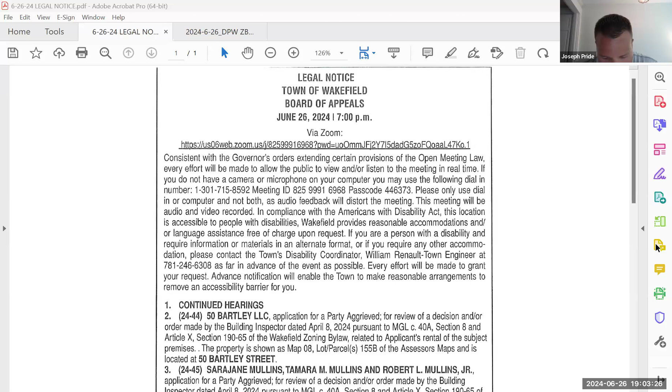As audio feedback will distort the meeting, this meeting will be audio and video recorded. In compliance with the Americans with Disabilities Act, this location is accessible to people with disabilities. Wakefield provides reasonable accommodations and or language assistance free of charge upon request. If you are a person with a disability and require information on or materials in an alternate format, or if you require any other accommodation, please contact the town's disability coordinator, William Renault, town engineer, at 781-246-6308. As far in advance as possible, every effort will be made to grant your request. Advance notification will enable the town to make reasonable arrangements to remove an accessibility barrier for you.

1. Continued hearings. 2. 24-44 50 Bartley LLC. Application for a party aggrieved for review of a decision and or order made by the building inspector dated April 8th, 2024, pursuant to MGLC 40A, Section A, and Article 10, Section 190-65 of the Wakefield zoning bylaw, related to the applicant's rental of the subject premises. The property is shown as map 08, lot parcel 155B of the assessors map and is located at 50 Bartley Street.

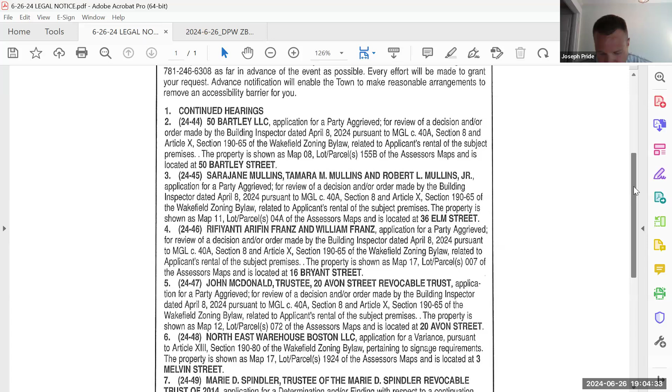3. 24-45 Sarajane Mullins, Tamara M. Mullins, and Robert L. Mullins Jr. Application for a party aggrieved for review of a decision and or order made by the building inspector dated April 8th, 2024, pursuant to MGLC 40A, Section A, and Article 10, Section 190-65 of the Wakefield zoning bylaw, related to the applicant's rental of the subject premises. The property is shown as map 11, lot parcel 04A of the assessors map and is located at 36 Elm Street.

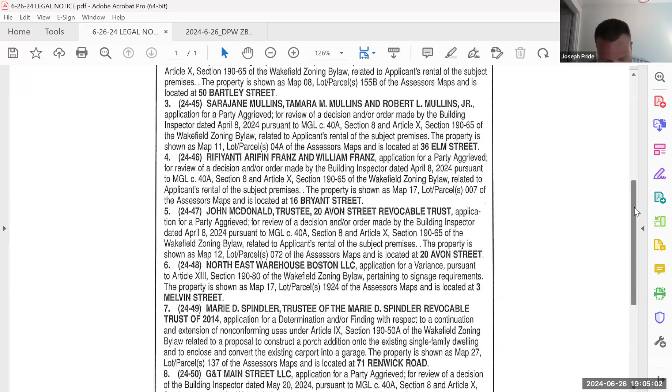4. 24-46 Rifiyanti Arifin Franz and William Franz. Application for a party aggrieved for review of a decision and or order made by the building inspector dated April 8th, 2024, pursuant to MGLC 40A, Section 8, and Article 10, Section 190-65 of the Wakefield zoning bylaw, related to applicant's rental of the subject premises. The property is shown as map 17, lot parcel 007 of the assessors map and is located at 16 Bryant Street.

5. 24-47 John McDonald, trustee, 20 Avon Street, revocable trust. Application for a party aggrieved for review of a decision and or order made by the building inspector dated April 8th, 2024, pursuant to MGLC 40A, Section 8 and Article 10, Section 190-65 of the Wakefield zoning bylaw, related to applicant's rental of the subject premises. The property is shown as map 12, lot parcel 072 of the assessors map, and is located at 20 Avon Street.

24-48, sorry. Northeast Warehouse, Boston, LLC. Application for a variance pursuant to Article 13, Section 190-80 of the Wakefield zoning bylaw pertaining to signage requirements. The property is shown as map 17, lot parcel 1924 of the assessors map, and is located at 3 Melvin Street. 7.

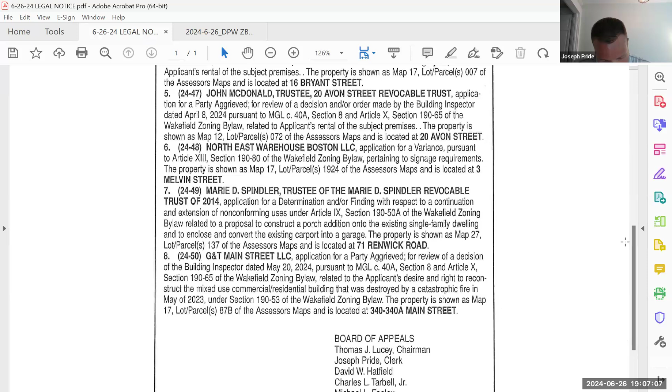Marie D. Spindler, trustee of the Marie D. Spindler Revocable Trust of 2014. Application for determination and/or finding with respects to a continuation and extension of non-conforming uses under Article 9, Section 190-50A of the Wakefield zoning bylaw, related to proposal to construct a porch addition onto the existing single-family dwelling and to enclose and convert the existing carport into a garage. The property is shown as map 27, lot parcel 137 of the assessors map, and is located at 71 Renwick Road.

8. 24-50 G&T Main Street LLC. Application for a party aggrieved for review of a decision of the building inspector dated May 20th, 2024.

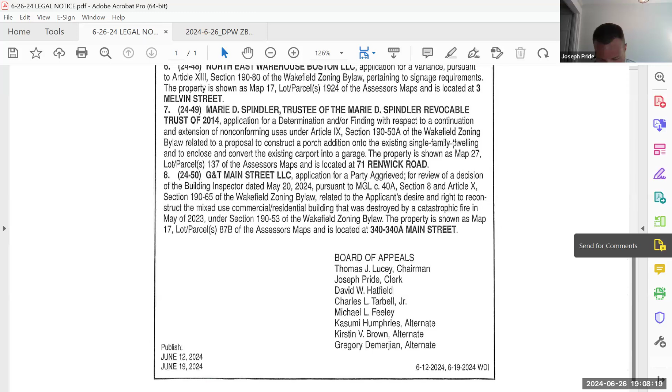Pursuant to MGLC 40A, Section 8 and Article 10, Section 190-65 of the Wakefield zoning bylaw, related to the applicant's desire and right to reconstruct a mixed-use commercial residential building that was destroyed by a catastrophic fire in May of 2023, under Section 190-53 of the Wakefield zoning bylaw. The property is shown as map 17, lot parcel 87B of the assessor's map, and is located at 340-340A Main Street, Board of Appeals.

Thank you, Joe. Tough one tonight.

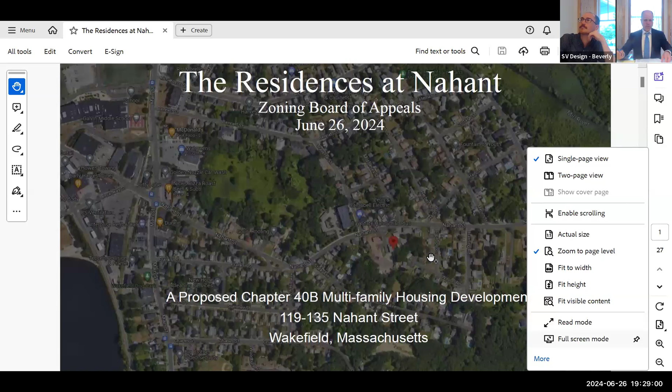Absolutely. So what we thought might be helpful is to talk about— yeah, this isn't sending.

So what we thought would be helpful is to talk about some of the design changes, in addition to the requested waivers and many other elements of this proposed development that you are very keen on understanding and focused on, the architectural plans and how we think this is going to look. You want to make sure that as we present it, it looks as it would look superimposed on the existing condition. Is that a fair characterization? We added elements like telephone poles, things that are on the site now that we don't expect to change all that much.

Through the chair and the board, I'd like to hand it over to Stefano, who can walk you through this. Again, we will confine this presentation to just changes. We won't go over what we've already talked about in the past, okay? Try to move quick here. Stefano Basso, SV Design, office at 126 Dodge Street in Beverly. Thanks for having us again tonight.

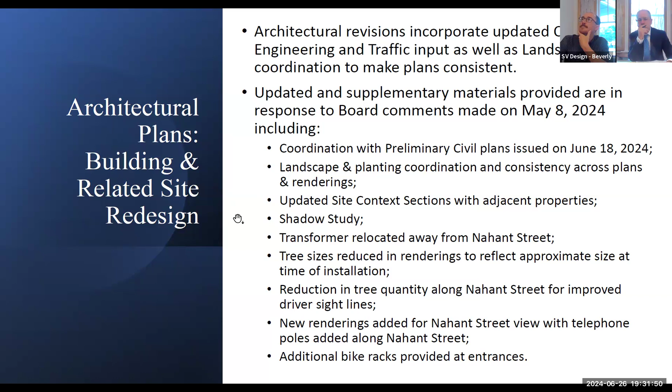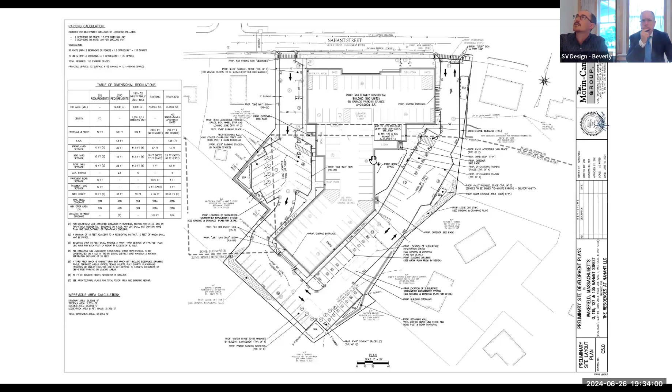The EV charging station is a little tough to see. Can I zoom in? EV charging spaces are located here, so those are closer to the building, closer to the garage entrances.

The fire departments typically like to see them outside of the building because of the risk of fire. They like to see them close to where they can get to them on the site. And we try not to locate them too far away from the building because of the conduit runs. So those are the spots for the EV charging.

This is a little easier to read, the transformer over here on the east side. If you remember, it was back here right in the corner off the sidewalk before. So originally very visible from the roadway, now it's tucked back.

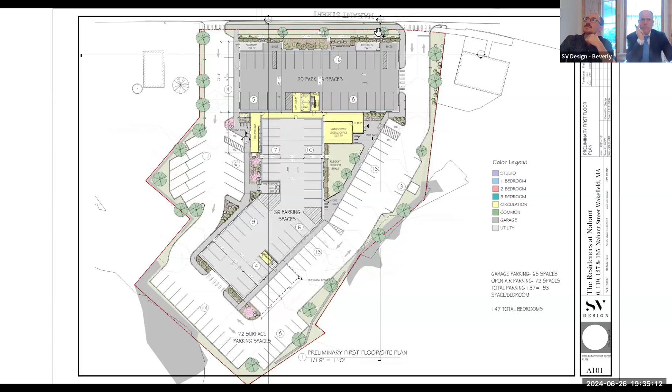We have cut back the fence on this corner here as well to allow for better sight lines. And we've reduced the trees we're showing in front of the building so that a driver exiting the property has a better sight line and less obstructions looking to the west down Nahant Street.

No changes to the building floor plans, so I won't get into that.

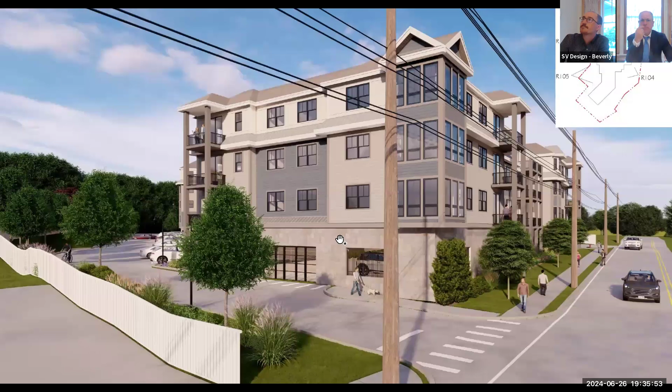Close up of the building, we've added the telephone poles in on this view so you can see their location relative to the building with the overhead wires.

Can you clarify the distance to those poles? Has that been measured and reviewed with the DPW? Wasn't there an issue on another project, board members, where the building was gonna be too close to some power lines and they had to be so many feet away? Yeah, the balconies, you're right, Dave. I think that was on Carmine, wasn't it? Or the Water Street one, that corner, Carmine, the Water Street one that never got done. But anyway, do you know the distance there? That was on Water Street where the lines were almost touching the building. They have to be 10 feet from that.

Is it 10 or 14? I forget, it was... yeah, so specifically we can get back to you on that, Mr. Hatfield. All right, the town engineer will know. I mean, the DPW will, or the light department, sorry.

Yeah, yeah, I think in clarification of that, Scott Cameron is talking with your light department on relocating perhaps telephone poles or wires. I've not been a part of that discussion, so I'm checking in to make sure the distances are proper, that they don't have to be moved. I know the issue is being talked about. I just don't know the status of it, and I don't certainly know if it's concluded. I doubt it has, because I know nothing about it, but I know it's being talked about. Okay, good, thank you.

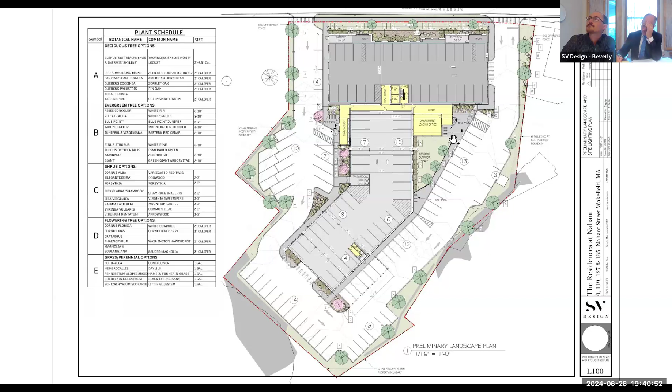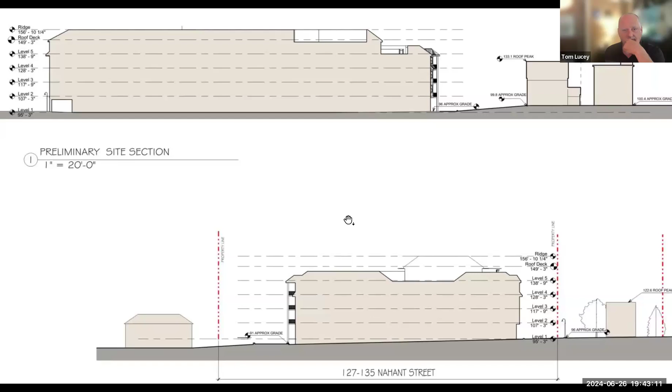Yeah, just, if you go back up to that section, the amount of massing, I mean, wow. Compared to those little houses across the street, you know, yikes. All right, it is what it is, this is what you're proposing, so whatever, I mean, but that's a Titanic compared to like a canoe. I don't know how else to describe it.

Yeah, I mean, this is a view that, you know, it's a diagram, so it's not something that you experience in this relationship, in reality, ever. The relationship that you're going to get on the street is the difference between a 4-story and a 2.5 story or 3-story building across the street. But I hear what you're saying. If you do look at going all the way back down the site...

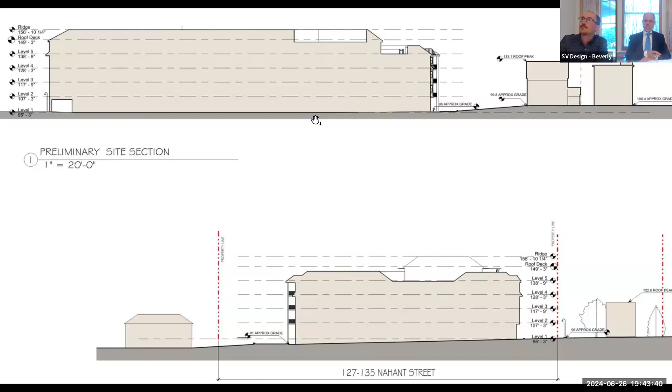So the second one in the middle - well, excuse me, sorry, coming off mute. Mr. Chair, what pages are these in the reports that we were given? Are they in there, architect? What? They were in the back of, hold on, which document? I'm looking... Yeah, in the architectural set, it's right after the renderings. Oh, thought it was right after the renderings.

I got Mr. Hatfield's material, it's in the architectural set. Page 11, 302... preliminary architectural plans, new construction is the title of the document. I scrolled too fast, it's tucked in the back with the shadow thing. A lot of pages here, a lot of reports. Yeah, there was a lot of stuff for sure.

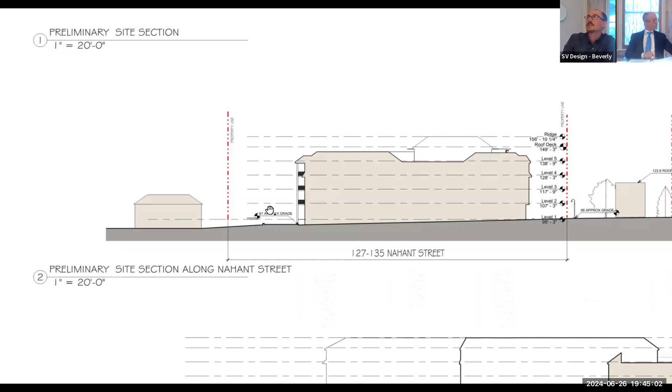So the second section is cutting parallel with Nahant Street, cutting through the front of the building, the 4-story portion. These are the buildings on either side, the western driveway over here on the left with the neighboring house, and the eastern driveway on the right with the neighboring house.

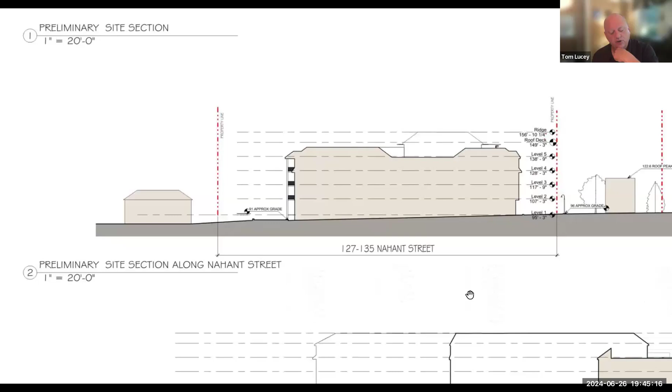For people that didn't get these plans, what's the length of the building up front compared to the length of the buildings on each side? I don't have a scale on this. Let's see - because the neighbors don't get what the board members get. There's obviously a scale.

We have 163 feet of length on our building, and I would say close to 50 feet for 143 Nahant. If yours is 163, it's more than 3 times larger than the one on the left. So 143 Nahant, I would say about 50 feet.

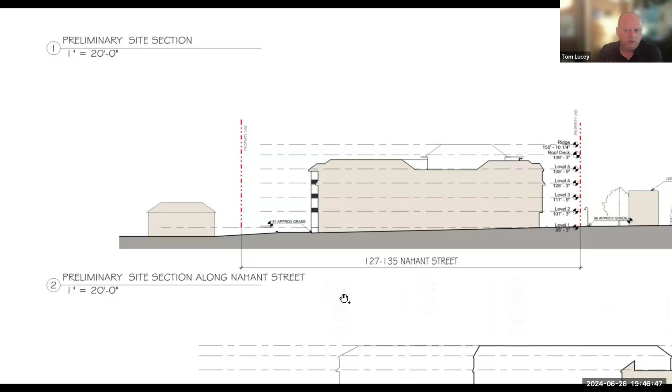If it's helpful, we could add the lengths onto this and get you that. How about the building on the right there? So 109. Looks more like in the 25, 28-foot range. So just making the point, yours is exponentially larger, not by a little bit. Okay, please proceed.

And then this one, zoom out a little bit. So this one's cutting through just the 4-story piece, a little bit further to the east on the right of the sheet. It's only cutting through the 4-story part of the building, running back to the rear of the site, to the neighboring property downhill a little bit.

Comments, questions? I think this was the elevation we wanted to see, the east one. It just seems like this ledge area is cutting off that true elevation change from the street. Could you repeat the question? Yeah, this was the elevation we were questioning, the east one, and it seems like this gray hatch was blocking off the true elevation change from the street.

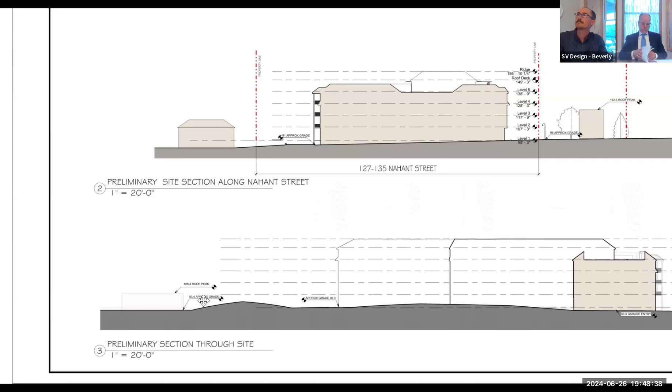What is the elevation at the left side of this section of the building? Let me zoom in here. So we have 93.4 at the house, and 96.3 at the rear of the building here. There is a pretty good size ledge - I think that's cutting through a portion where the site is starting to slope up more on the neighboring property.

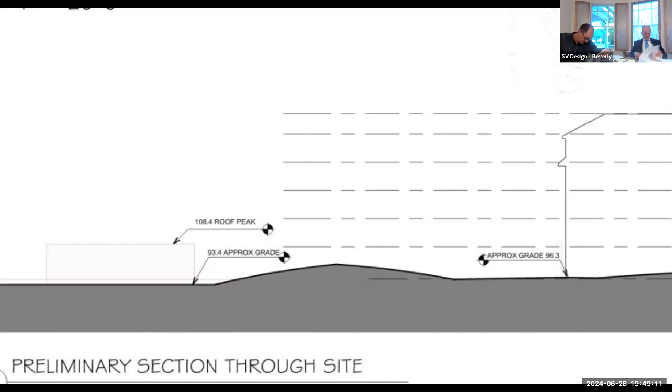I think these are really good questions for when the civil engineer is here, who can actually answer these rather than having the architect try to struggle through it - fair point, in my humble opinion.

So you've heard these questions. I think Greg raised a good point. We'd like it addressed by the civil engineer at the next meeting. All right, we will make a note.

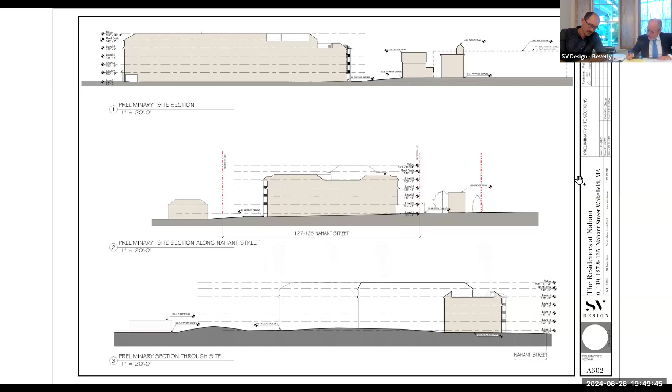But I would just echo your comment, Mr. Chair - wow, just the scale when you see it in some of these, and further on with the shadow too. I mean, it's just... yep.

Just that there are a lot of people here, and I think they'd appreciate you referring to those buildings as homes, not just buildings or blocks. And also, 163 feet, just to confirm, that's over half a football field, is that correct? A football field being 300 feet, and this is 163, so it's over half a football field. Yeah, sure, if we don't have the end zones, then I'll agree with you.

All right, we're ready for the shadow study. Please proceed. So a quick overview for folks who maybe haven't seen a shadow study before - this is a diagram where we look at the building and we've selected 9 moments within the year, trying to get as broad a representation as possible of what the shadow impact will be. So we use the shortest day of the year, the longest day of the year, and the midpoint.

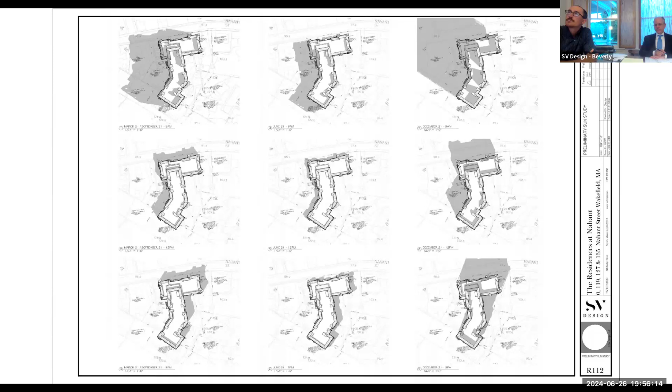Board members? Yeah, Mr. Chairman, if I can — I know the comments were focused on the neighbors and the neighbors' houses. What I'm most concerned about, in almost every one of these except some of the noon ones, is the amount of shadow being placed on Nahant Street. In our climate during the winter, the roads are icy and unsafe. This road is horrible to begin with, and now we're casting a shadow on it for the majority of the day. We can certainly nitpick the word majority, but for a lot of the day this scares me to no end regarding the safety of that road in front of this building. The only reason the shadow affects that much of Nahant is because of how close the building is to Nahant Street. So between the sidewalk in front of this building being covered by shadow almost all the time, and the shadows on Nahant Street, I'm hoping our TAC has seen this, because to me this is a huge, huge safety concern.

If they have it, Chip, I'll make sure it's forwarded to Lieutenant Anderson. Anybody else?

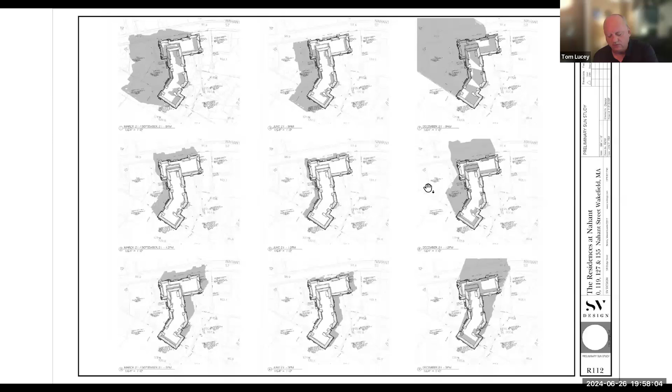That would be great, I'd appreciate it. Some of the abutters on this call will want to see where their house sits and where they sit relative to the shadows. I think that's a fair request from the neighbors. Yeah, we can amend this one so it's a little more legible. We just brought in the civil plan, so that's why it's reading a little faintly, but we can go over it. Okay, thank you, please do.

Mr. Chair, I would just add to Chip's comment. He voiced a totally valid concern. I'd say it's primarily due to the proximity to the street and the mass of the building. It's tall, it's huge, and it's casting a huge shadow. Their engineer even said it's due to the mass. So everyone needs to acknowledge that it's due to the proximity of the street and the overall mass of the building.

Next. Anybody else? I agree with Chip and Dave and everybody else. Wintertime is the time everybody wants to see the sun, and it's in the shadow all day, every day in the wintertime. I don't know what to say. It's just too big.

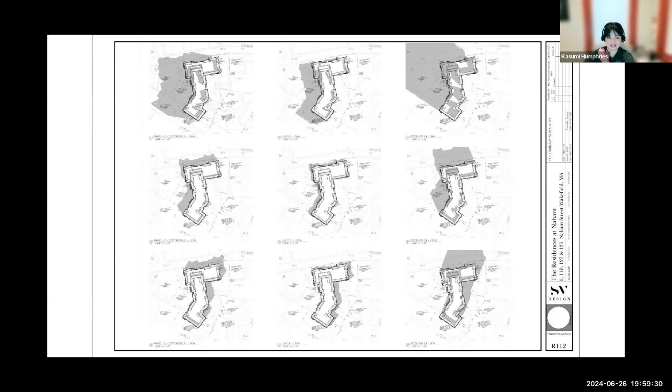I'd like to echo Chip's comment on the safety and the ice, and how that is ever going to melt or see the light of day. Basically, as Dave was getting into the massing and the size, just the sheer size, we haven't even got into how many cars come out of here, trucks. I'm worried that as a town we're about to spend $400 million on a new high school that nobody can get to. That's my comment.

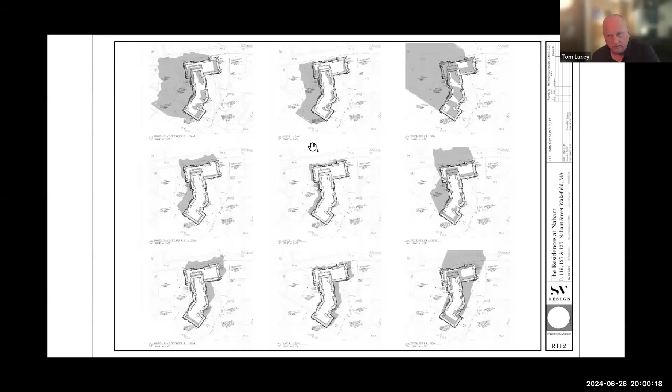All right, thank you. Anybody else before we move forward? Okay, with that, Mr. Panos, you have anything else you want to share tonight? Were there any other changes?

One thing I would direct your attention to, because it's a handy chart, we did upgrade or update the building summary, and this will give you a lot of information at your fingertips with regard to how many bedrooms we have, how many units per with associated bedrooms, associated parking, ADA compatibility, that type of thing. So if you're looking for some quick information, this is a good place to find it with regard to the proposed development. I just want to draw your attention to that. It was also revised from the initial submission back in September last year.

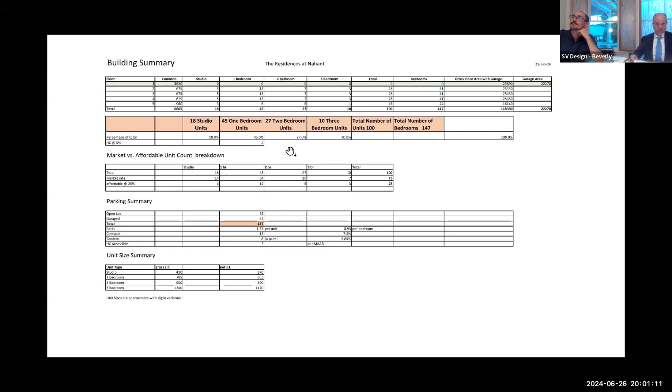Okay, thank you. And with that, I think we have our marching orders for July, and what you'd like to see. It's going to be very engineering focused. I will prepare a presentation on the zoning waivers and make that technical correction, thank you for pointing that out. The reason why I think the subcommittee meeting a couple of days ahead of time might be helpful is to perhaps better focus the presentation on the 10th, but entirely up to you, based on my experience and how these subcommittee meetings have been flowing.

We found them helpful in focusing the conversation and preparing for the presentations before the board, but up to you. Like I said, I'll talk to Chip. I'm available, and I agree that we should hone in on what will be presented at the following couple of days meeting. So I'll talk to Chip about the 8th, given our meeting on the 10th.

And I think we're all set with our presentation tonight, so I'm happy to give it back to the board. Board members, any other comments, questions before I turn it over to members of the public for public comment? No, Mr. Chair. Hearing, seeing none.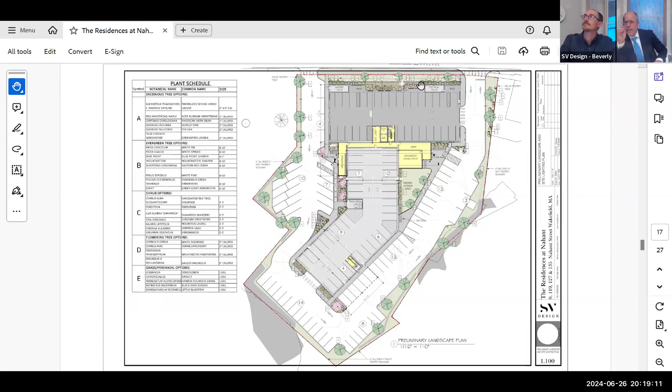My question was about the parking in front versus the rendering shown on Nahant Street—I didn't see any parking in the rendering, just buildings, so I was wondering about that. Can you go back to the site plan? We'll share our screen. There is no parking proposed in front. All the parking is proposed to each side of the building. So there's no parking on Nahant Street proposed. There's a garage on the first floor—it's not underground, it's a first floor garage.

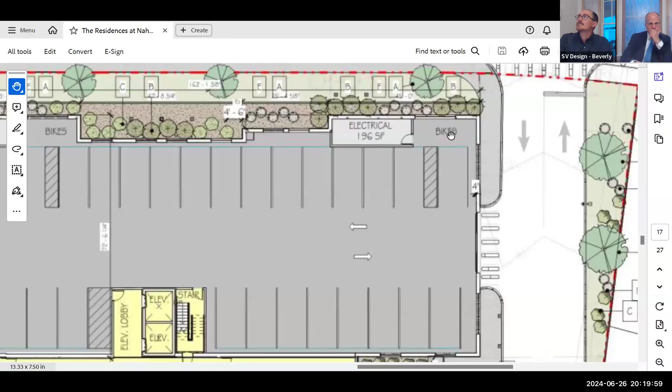There'll be parking there, but it's accessed from the back of the building from two points—the back and the side—but there's no parking in front of the building. Is that what you were asking, Mr. Jana? I'm asking if you can see the parking from the street. No, it's shielded—I'll defer to the architect on how that works, but you will not be able to see the parking from the front of the building, I don't believe. Stefano, do you want to address that? This isn't a surface parking lot, it's a garage. Can you show the rendering from Nahant Street, please? Because I believe there are windows where you'll be able to see into the cars.

Yeah, so you're talking about the openings in the wall? That's what I was asking about. Now, are these plans available to the public? Yeah, well, I'll talk to Gail Conroy about putting them up on the ZBA website.

I believe Mr. Tabo was talking about the shadowing with water building up out in front, and obviously if it's cold, ice melts. I believe the design team was talking about how the pitch from the building itself will go, and the runoff will head towards Nahant Street. So sun's out, snow melts, ice melts, runs onto Nahant Street, sun's gone, automatically freezes. And there's two-way traffic coming into that part of the building on one side of it.

So you have double the traffic coming in there, along with traffic going east and west on Nahant Street. So that runoff, how is that contained to not head out there and cause a problem? Because it's not like somebody's going to run out there every time it freezes and put snow melt down so there won't be accidents. In the winter, it starts getting dark at 5 o'clock and starts freezing. There's a lot of traffic coming up and down the street between school, after-school events, everyday traffic, and it's a tight area right there. Is that taken into effect?

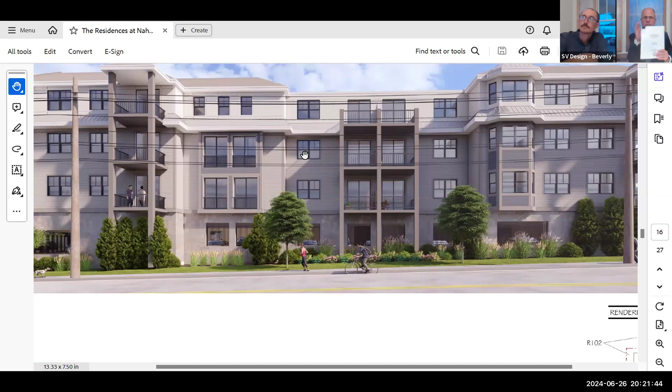If I may answer that, Mr. Chair, runoff from the property is addressed in a 177-page report that was submitted to the board. I'd prefer to wait for the engineer to present it, but runoff from the top of the building, from impervious surface, is taken into account very much so. There are catch basins and storm infiltrators proposed underneath the ground that will catch the runoff from the rooftop and other aspects of the property. With that, I've exceeded my expertise on the matter, and I really don't want to go further.

Please make a note to have your engineer address it when he returns on July 10th. I think it's a legitimate point. Sure. Thank you, and that's all I have for this evening. Thank you, Carl.

That's the last hand I see raised. One more. Mr. Conway, you trying to signal me? Yes. Okay, if you could give your name and address, please, for the record.

Yeah, my name is Joseph Conway. I'm at 18 Wilson Road. I'm an abutter on the east side of the project. As far as the shadowing goes, what they put up on the screens tonight, I don't think it's fair and reasonable to all the abutters or the people on either side of Nahant Street and Wilson Road. I don't think it's fair that we don't actually get to see any of the plans. I mean, you put them up on the screen, all we see is these little pictures, but we can't see, like was stated previously, we can't see our property lines.

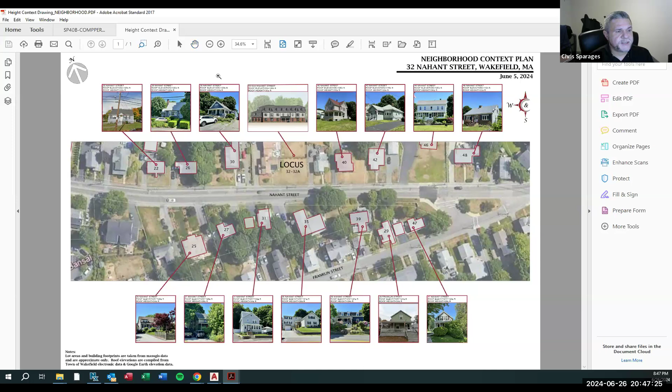Okay, so starting, if I zoom in here to the center of the plan, you can see the locus and the white lines in the background. These are approximate property lines from the assessor's map. This is the site locus, and our proposed building has a roof height of plus or minus 35 feet.

Let's start heading towards the high school, to the east. At number 40, we have this structure with a roof height of approximately 32 feet. Coming down the street further, this is a 1 to 1.5 story building with a roof height of only 22 feet at 42 Nahant Street.

46 is set back a little bit. It's a two-story residential building, roof height approximately 34 feet. To the right of that looks like a small cape, 1.5 stories, with a roof height of approximately 22 feet.

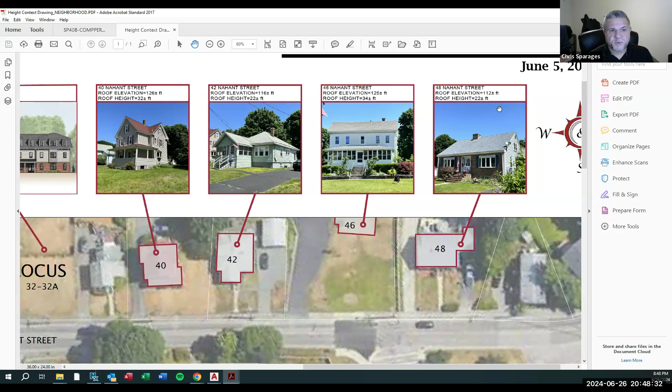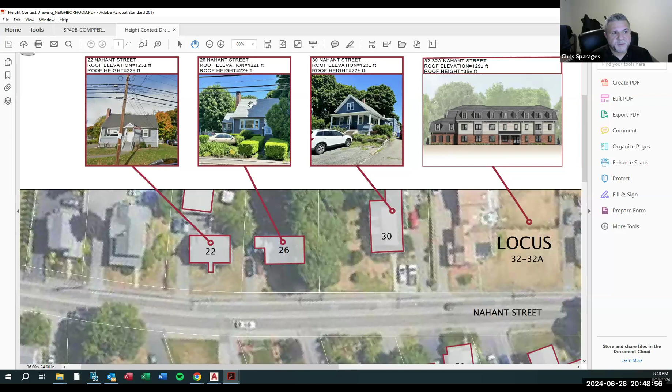Now heading back in the other direction on our side of the street, heading west, number 30 next door to us is a 1.5 story structure at approximately 22 feet high. Number 26 has a cape with a sloped roof, approximate roof height of 22 feet, 1.5 stories. Number 22 is another small cape, approximately 22 foot roof height.

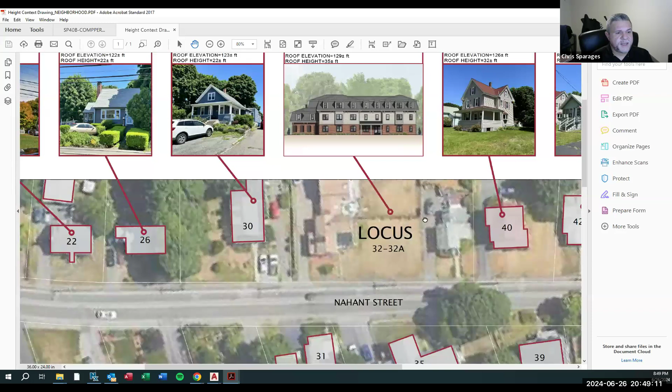Coming back to our locus, if we come across the street, and zoom out a little bit so we can see the pictures, which are set back a little further - directly across the street from our locus is number 35, a two-story structure with a relatively shallow roof on the two-story part. So we're at a roof height of 30 feet plus or minus at number 35.

Heading east, 39 Nahant Street is a 1.5 story building. You can see the mansard roof, a similar architectural feature to ours, on that second story, with a roof height of approximately 24 feet. Number 29, at 29 Franklin Street, actually fronts on Franklin Street.

It backs up to Nahant, so you can't really see it from the street, but this roof height is approximately 24 feet for this home. On the corner lot with an address of 47 Nahant Street, we have a roof height of approximately 26 feet. It's a 1.5 to 2 story structure.

Heading to the west, here's our locus again - across the street, number 31 Nahant Street. We have a roof height for this structure that looks like it's been added onto relatively recently, that looks like relatively new construction. That roof height is approximately 34 feet.

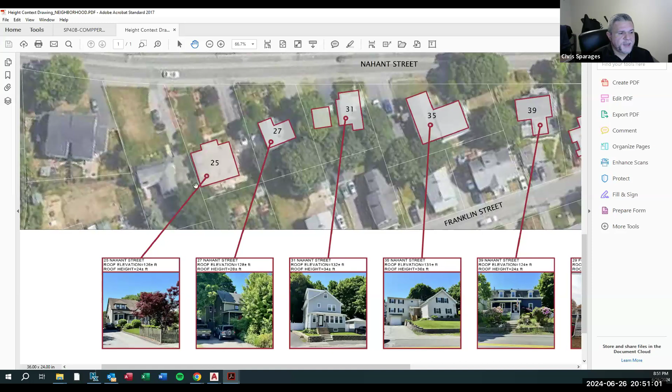Next to that is a smaller footprint home at number 27, but it has some pretty good height to it at 28 feet approximate roof height. And then we ended our analysis at 25 Nahant Street, where we have a 1.5 to 2-story home at roof height approximately 24 feet.

I'll bring us back to the center of the plan and zoom out a little bit. That was the extent of the site context study. The lot areas and building footprints are taken from Mass GIS data, which should be considered approximate only, and the roof elevations were compiled from the Town of Wakefield electronic data available at the assessor's office, together with Google Earth elevation data.

Okay, comments and questions from the board?

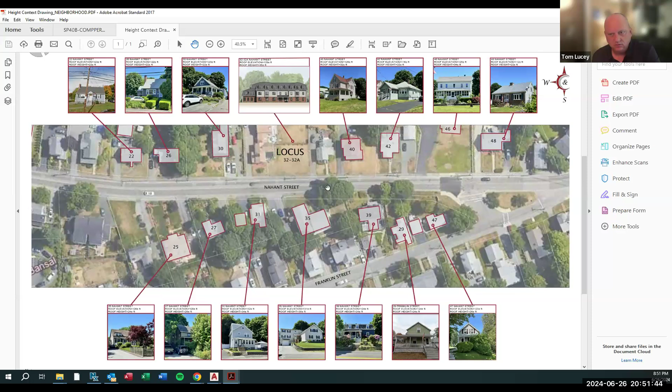Didn't see it. Did you guys do any sort of cut-through, like you would show a building's height, where you're at 35 and all these other houses at 22 or 24, just from a streetscape standpoint, or the overhead?

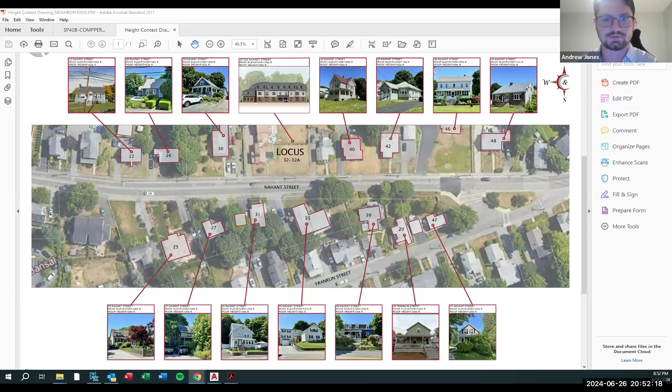I can answer that - go ahead, Andrew. Sorry, Chris. Andrew Jones, Phoenix Architects. Chip, yeah, we have a streetscape showing the house to the left and right, number 30 and also 40. I can pull it up if you'd like to see it.

It's from the last presentation, I remember that. I just didn't know if you then extended it to all these houses as well. No, we haven't as of yet.

I mean, the thing that jumped out at me most, Mr. Chairman - I'd love to see Andrew's, just to remind us of it - but at 35 feet, the majority of these houses were anywhere from 28 to 22 feet, which puts this building almost 12 to 14 feet taller than the surrounding buildings, other than a few that were in the low 30s.

So what's the height of the building to the right? That was one of the smaller ones, around 32 or 34 feet, I think 32 approximately. Which looks about right considering yours is 35. And the one to the left was about 22.

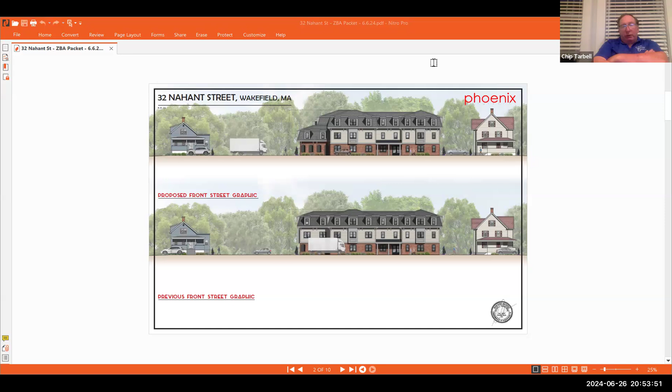So if we look at this, we understand how tall you are compared to the other 22s, and a majority of them were 22, 24 feet. That's all I wanted to understand, that there are very few that are equal, and none are equal - even the closest ones are a few feet less.

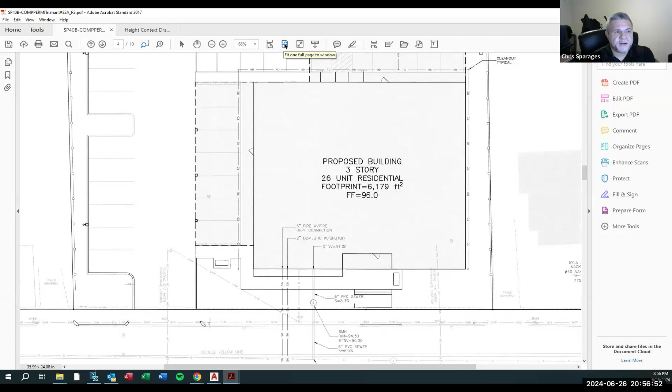There were a couple comments at the last public hearing during our civil site presentation. Mr. Tarbell asked about our utility plan - if it's okay, I'll share my screen again. He noticed we showed our utility connection to a utility pole directly in front of our site, and asked if that's how we'd power the building. I said I would follow up with Wakefield Gas and Light - we have a good working relationship with Vincent McMahon, he prefers Vinny. I reached out to Vinny since last time, and he got a chance to review the plan in detail.

I'm going to go to our landscaping plan to show what Vinny talked to me about. He explained there's plenty of power along Nahant Street, but because of the nature of the building and the electrical need, it would make most sense to have a transformer pad on the ground. He gave me 4 recommended locations, and I wanted to run that by the board tonight to get feedback on the location.

Since the lines run along the street, the 2 locations most preferable to Wakefield Gas and Light are this landscape island out here, or this landscape island here. The other 2 alternatives would be this landscape island a bit inside the site, or back in this area. I wanted to ask the board, through you Mr. Chair, if there's a preference, or if we can work with Vinny to come up with what makes the most sense for running utilities.

No, I think what you're going to hear from board members is that they don't want to see it from the street. The ones on the side, I'd be concerned about the impact on the abutter. So my initial reaction is that back island, but I'd be glad to hear from other board members.

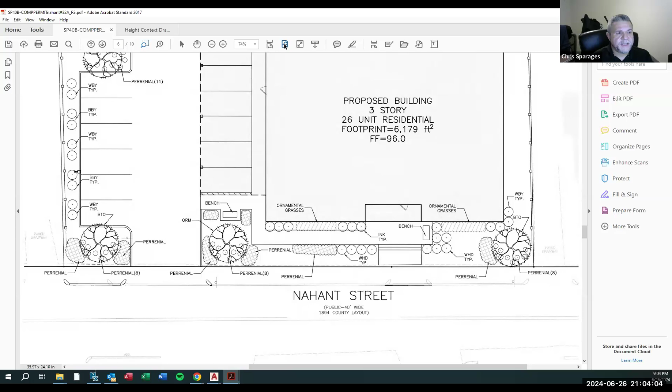That was a concern that came out of the Traffic Advisory Committee. We've removed any shrubs and tall grasses from the sight triangle, which is created by drawing a triangle starting 14.5 feet in from the gutter line and looking left and right out of our entrance, so someone leaving the site doesn't have interference from vegetation. So we've beefed up our landscaping, and I took another look at the whole site and added additional shrub plantings and groupings across the rear of the site to the north and west. We beefed that up quite a bit. I just wanted to point that out.

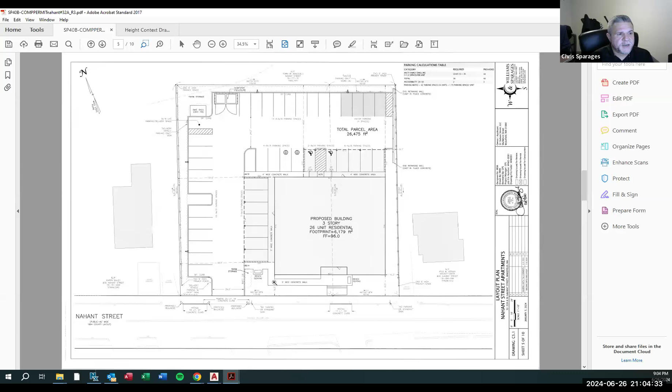So it was the transformer pad, the landscaping, and Chris, is the vertical granite curbing called out anywhere? On our layout plan is where we call out materials like that. And what we're proposing on this project, Mr. Tarbell, is bituminous curbing. I know that you folks have requested different types of curbing in the past on these types of projects. Cost is a consideration, and that's one of the driving forces behind our selection in this case, I'll be honest. I don't know if there's somewhere we can meet in the middle. This is not a very big site, but it's a big cost item.

Well, I'll just add that we don't call for different types of curb. We always call for the one that's standard for what this board does. So it's how you've been here many times before, Mr. Sparages. You come in with that and expect. On other 40B projects, we've used other materials in addition to granite roundings. That's why, maybe you can get away with something, but to have none of it on site isn't going to happen.

Okay, well, let me go back to the drawing board on that one. It's a small project, so the delta should be de minimis. Yeah, I'll definitely review it with the property owner, and we'll come back with something better than what you see here. That would be good. Okay.

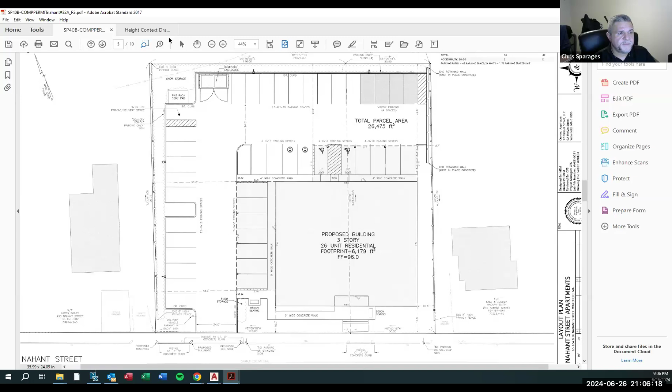Chris, I got a quick question on the landscape, if you want to go back to that. Sure. The very front of the building, can you zoom in? Isn't it supposed to be crushed stone in the front, without the ornamental grasses and trees and all that? Does that have mulch there, or is that going to be crushed stone?

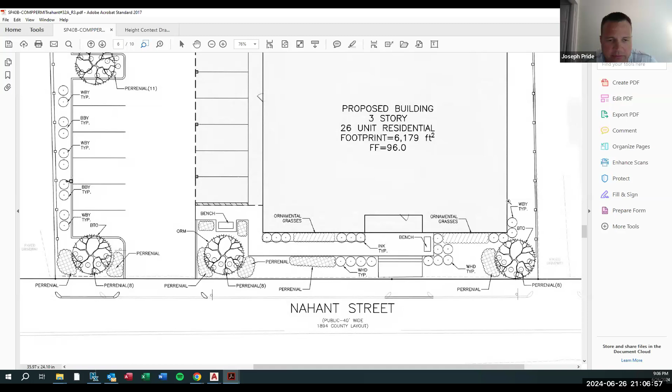So those details are sometimes not captured on this level of plan at this time, but you're absolutely right, Mr. Pride. This is going to be set in crushed stone within a certain number of inches of the foundation of the building. Absolutely. All right, just checking. Thank you. Okay.

So I'll end by apologizing, Mr. Chair. I did get angry earlier, and that's not like me, but now I know why, so maybe I'll explain. Here's the reason: the plan has changed, but if you go back in time, we started at 32 units. We eliminated a floor off the building, so that didn't change anything on the ground per se. Then we went from 32 to 26, I believe, and now we've knocked the project down to 24, and the footprint changed a little bit. I think we have less impervious surface now than we did before, but we didn't change anything stormwater related, even though I probably could have made it a little bit smaller. So that's why I am like, it didn't change, I don't understand. But I think I need to explain that to Bill. So I apologize, Mr. Chair.

Well, as you can imagine, I can only go by what the letter I get from town engineering says. But you should know that it hasn't changed. So if anything, we kept it conservative by not changing it. But I'll explain that to Bill, and hopefully he'll report back to you.

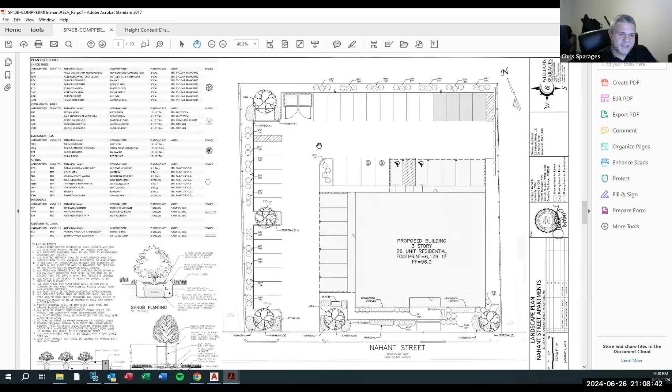Okay, we'll wait to hear from him. Go ahead, Mickey, I'm sorry to interrupt you. No, it's me, Mr. Chair. Sorry to interrupt, Dave. My notes say we are down to 24 units, but this says 26. Yep, that's a mistake on our plan, Mr. Hatfield. I apologize. No worries, I just don't know if it's just a typo on this one. Hopefully we get everything cleaned up consistently. Is it 23, 24? It's 24. It's 24, per my notes.

Hopefully 22 soon. With amenity space, I really would like to know if they're seriously going to consider any amenity space other than a couple of benches. We've met many times, they've never actually said if they're going to consider trying to find a way to do that, because that would obviously mean doing something to the size of the building, moving it, reducing it.

Otherwise, it would just... And then the balcony choices were some Juliet, right? Some full. We're not even giving some folks a full balcony to, if they don't have outdoor space, give them a balcony, right? So I don't know.

We did give some balconies. I think we were trying to be thoughtful about the neighbors and not having balconies facing the street. So you'll see most of them are facing towards the back where there's no homes or residences. So that was kind of the design choice there.

No, I understand moving, not overlooking neighbors, that could be disconcerting, but I get that. But again, it's just like to bring it to closure, that the applicant's going to consider some sort of additional outdoor amenity space, or they're not. It just keeps coming up, and we just don't really close on it. So it'd be good to get an answer one way or another. They're going to make a change to accommodate something, or they're not, and we're going to vote on what we're seeing today potentially, unless it continues to evolve after traffic and everything else.

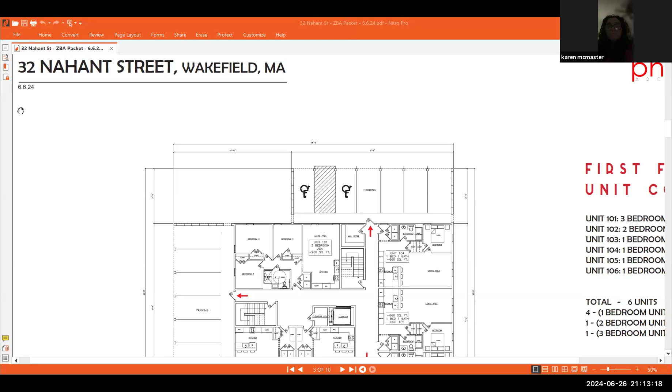Mr. Chair, I can show that if you'd like. Please do. Here. Okay, do you see the screen right now? I do. So this is the architectural, so it doesn't show really the site context, but the delivery parking spot is somewhere where my cursor is in the left-hand corner here. You drive in, this is one side of the parking, there's another side of the parking, it's in the corner. So the delivery person would come out, walk through here, walk through the back, come into the door, and then the mailroom is placed strategically right off the back of the building.

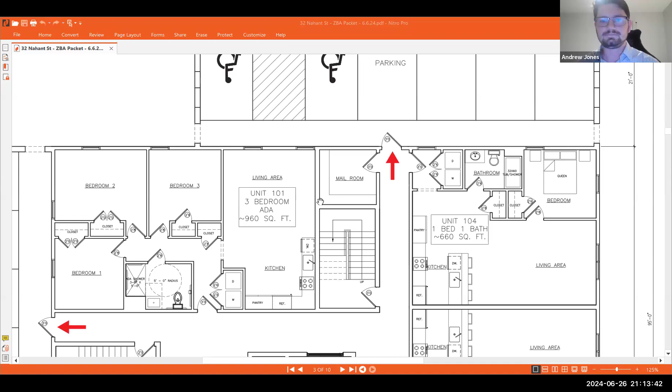At the same time, we also had a question regarding traffic, that there's one driveway in and out of the building. Traffic is terrible there. Coming out of the driveway, if you're taking a right, great, but if you're taking a left, not so great, because now you have traffic coming two ways. When it's backed up, if there's a car to your right, you're going to take a left, you're not going to be able to see anything.

There was a concern about maybe putting a box there. But if you put a box there, just about a football field away on the right-hand side of the building per your plans, or about the length of the building on the other project down the street on Hart Street, you're going to have I don't know how many cars coming out of there. So there's a lot of concern for a lot of traffic, and in my opinion both of these are way too big for this. You're adding so many cars to the area, and that was my concern.

So I voiced my concern, and it was answered, though I'm not sure who answered it, but I can go back and listen to the meeting. One of the answers was that this is not marketed towards a certain clientele - not in quotes, but around that. I didn't get to reply to that. I'm wondering, marketed to what clientele? Are we saying this is marketed towards a clientele that won't have cars and there won't be that many? I'm not sure who from the 32 Nahant Street team was there for that traffic meeting, and what that meant. Because it'd be a bit presumptuous to say we're marketing this towards somebody who, what, doesn't have cars?

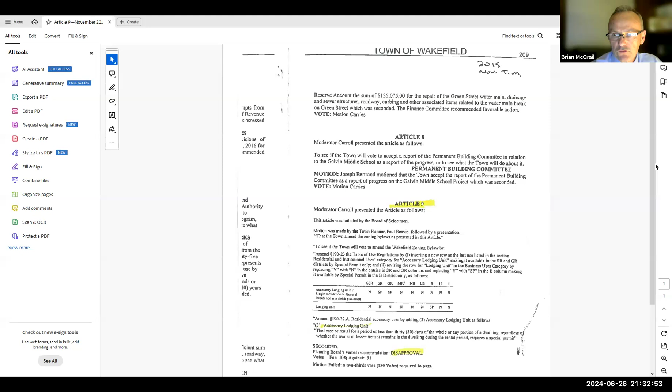So this is an excerpt from the 2015 annual town report. You'll notice Article 9. This is the November town meeting. This article was initiated by the Board of Selectmen at the time. A motion was made by the town planner, Paul Reavis, who was an advocate of this at the time, followed by a presentation. It was to amend the zoning bylaw.

And as you'll see, it created a use called accessory lodging unit in the single residence and general residence district, and required a special permit in the single residence and general residence district. And importantly, if you look where I've highlighted, it defined accessory lodging unit as the lease or rental for a period of less than 30 days. So that's really where they tried to define short term, as the whole or any portion of the dwelling, regardless of whether the owner or tenant remains in the dwelling during the rental period.

Please note that at that time, as you'll see below, the motion was seconded. The planning board's recommendation to town meeting was negative. The planning board voted a negative recommendation, disapproval. And the vote at town meeting was 104 to 91 - 104 in favor, 91 against.

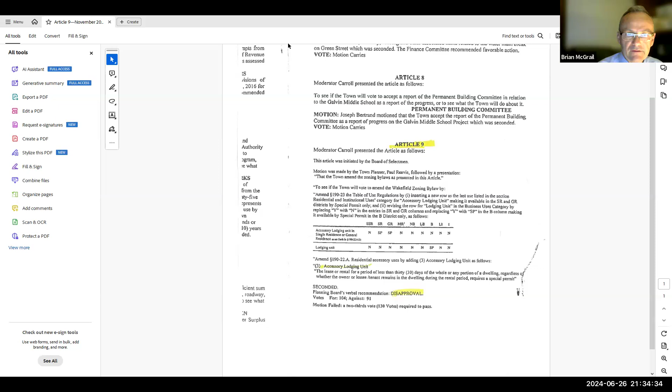As you note, it was stated the motion failed, a two-thirds vote required to pass. Now, 10 years later, and I'm going to stop sharing my screen - if somebody needs to see this, I can bring it back up - but now 10 years later, to issue an order declaring that Airbnb type rentals are completely illegal under our zoning bylaw is contradictory to that effort in 2015. And as I will detail in my presentation, it is also contradictory to the terms of our zoning bylaw as it stands today.

What happens is it's like trying to fit a square peg into a round hole, in order for someone who just decides they don't want to have an Airbnb type rental to not have it.

It's important to note that the only thing before your consideration tonight is the content of the cease and desist letter from the building inspector to all of our clients, which is verbatim the same in relation to the history that I just mentioned in the existing zoning bylaw. So really the four corners of the building inspector's letter, that's what's before you - what he has stated in that letter - and for you to determine if it's accurate and/or if it should be overturned, which we think it should.

So with that said, Mr. Chair, I'd like to bring up that letter because of its significance. I'm going to go through it in detail. Please do.

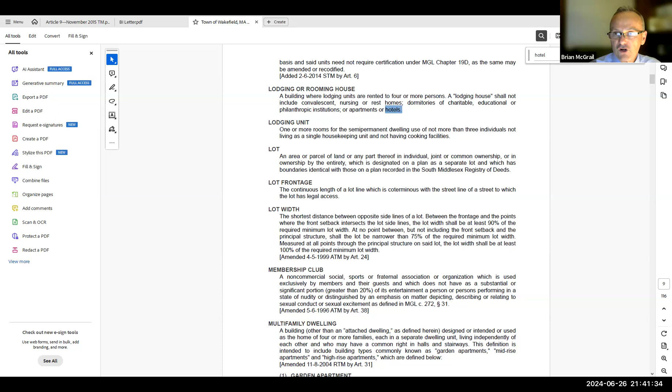The second area is in the table of uses, hotel intended for occupation of transients. And you got to look at the context of that.

Doesn't define transients, but again, I think we all know what a hotel is. And then this is really the interesting thing, where it says this deals with the accessory uses that are in hotels: restaurant, newsstand, drugstore, barber shop, or gift shop within and entered from a hotel. So that's what's in a hotel.

That's a lakeside office park hotel, Lakeside Inn. There's certain amenities in there for the people that stay. There's room service, there's maybe a little store, there's a bar, there's a restaurant, and that's where the differentiation is. That certainly is not stuff that happens inside our single or two family homes. And then there's also with hotels a requirement for loading bays, because a hotel is a commercial building. It's not a house.

And then the table of parking, the parking requirements, this is, you look at hotels. So this tells you the context in our bylaw of a hotel: 1 per 2 employees in the maximum working shift, plus 1 per guest room. You're not renting a whole house or a unit, you're renting a room. Plus 1 per 3 seats in a restaurant, as I just said, it's anticipated it would have a restaurant. Plus 1 per 200 square feet of space in a function room, not designed for eating. So that hotel is a facility.

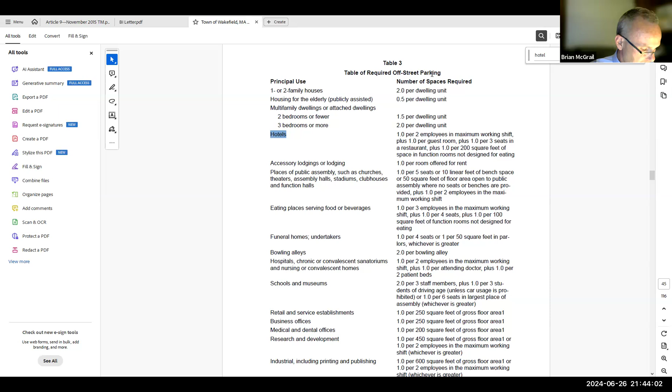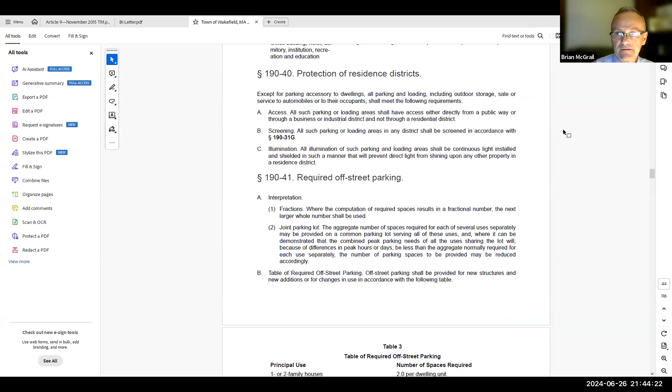So we would say that the rentals of our clients' properties is certainly not a hotel use under our zoning bylaw. Now, as far as the lodging or rooming house, which is mentioned in the building inspector's letter, that's real easy, because that is specifically defined. That is a defined term in our bylaw.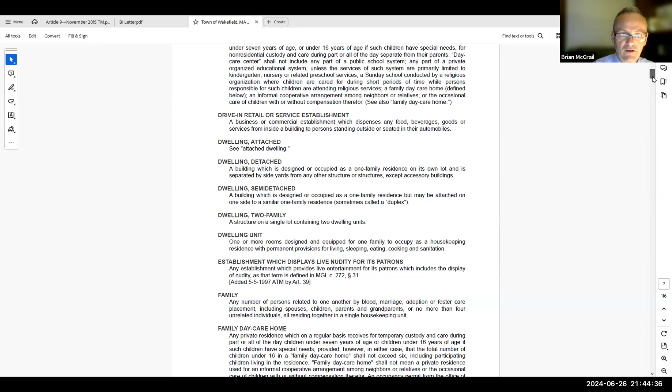So this is the definition section of our bylaw. And so you see it right here: lodging or rooming house. A building where lodging units, and you've got to focus on that word, lodging units, are rented to 4 or more persons. A lodging house shall not include a convalescent, nursing, rest home, dormitory, charitable, educational, as I've mentioned, it goes on, or hotels. So the definition of lodging or rooming house is driven by the definition of lodging unit.

Again, it starts with a building where lodging units. So now what's a lodging unit? And this is a critical component: 1 or more rooms for the semi-permanent dwelling use of not more than 3 individuals, not living as a single housekeeping unit, and not having cooking facilities. Well, all of our clients' properties have cooking facilities, they have kitchens. So clearly, on the face of the bylaw, it's not a lodging or rooming house use.

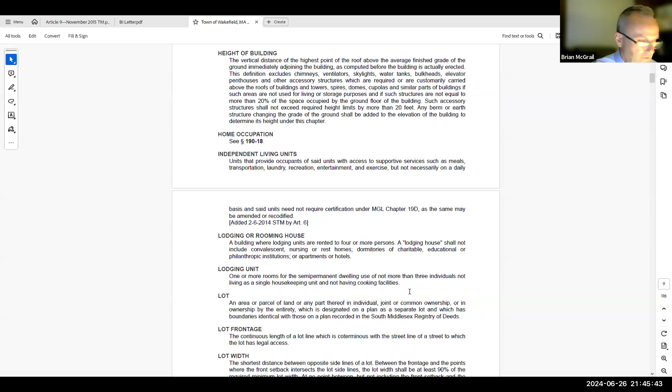And then I'm gonna go back to the letter for a minute, if I may, because there's another important aspect of that. That's okay with you, Mr. Chair? Please do. I won't be much longer. Thank you.

Then Mike has a whole presentation. Yeah, I was gonna take the words right out of my mouth. Because I just wanted, this is kind of, I think, and I understand after my discussion with them, the struggles of the building inspector, because it's a unique situation.

That when you look at, if you go on the letter, I'm sending this to you because the premises are located in either the single residence or general residence district. A hotel use is forbidden in both districts. We went through a hotel. And this is where there's kind of a confusing message to our clients, which is it says a lodging or rooming house use is likewise forbidden, excepting only in a general residence district is allowed by special permit. If the premises are located in a general residence district, I'm writing because the records show that you have not obtained a special permit. Well, our clients wouldn't obtain a special permit because they have kitchens. So they don't need one because they're not a lodging unit.

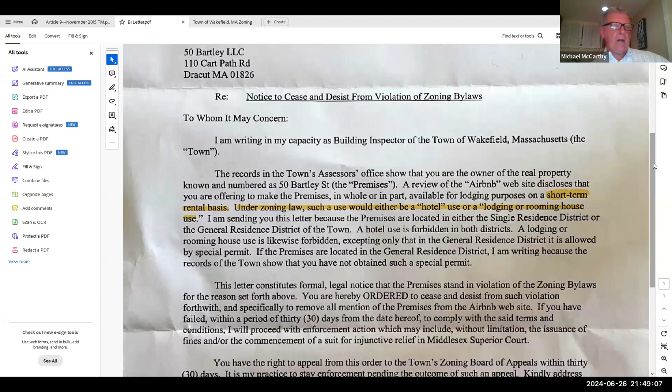So my comment while that's happening is that the nature of the complaint is such that it attempts to be a referendum or a bar on Airbnbs, because it was blasted out to 4 different properties and not any one in particular. So it's kind of a person trying to cast a broad net. But the point that I want to emphasize, and Brian did make it very clearly and eloquently, is that this is not a referendum on whether Airbnb should be allowed in town. It's simply a question of whether these 4 properties are hotel or lodging units.

And if you look at the letter, as Brian said, there's a couple of issues. It describes that these are being used on a short-term rental basis, and as Brian pointed out, it's not defined. He also noted importantly that it's subjective, but I would add it's variable, because if the building inspector moves on to another town or retires, a new building inspector comes in and says, you know what, I think it's 2 weeks, or I think it's 60 days. It's variable. It needs to be enforceable, and it can't be enforceable if it's not defined, it's subjective, and it's variable.

Now the next line says such a use would be either a hotel use or a lodging or rooming house use. It doesn't say why. It has a broad claim under zoning law, but Brian demonstrated very capably and concisely that it's not actually either a hotel use or lodging house use. So there's no real explanation as to why it would want it. It's a conclusory statement without any explanation that's demonstrably not accurate.

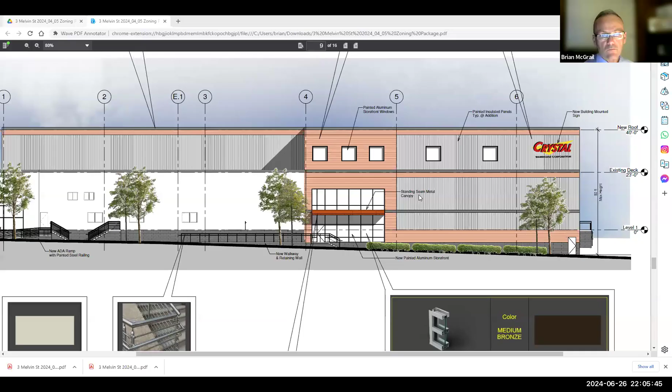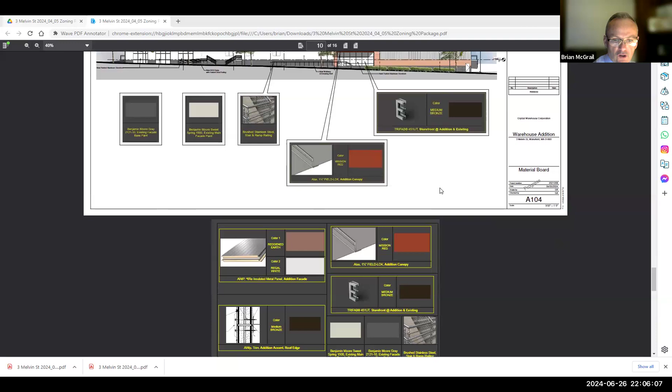So this is, you're familiar with the whole building, I'm not gonna waste time. There's an existing sign as you face Water Street here that they want to keep, a small sign. And then they have the warehouse sign, which I'm gonna show you, it's halo lit on this side. And then they're also proposing it on the back side of the building, which faces kind of McClellan Concrete.

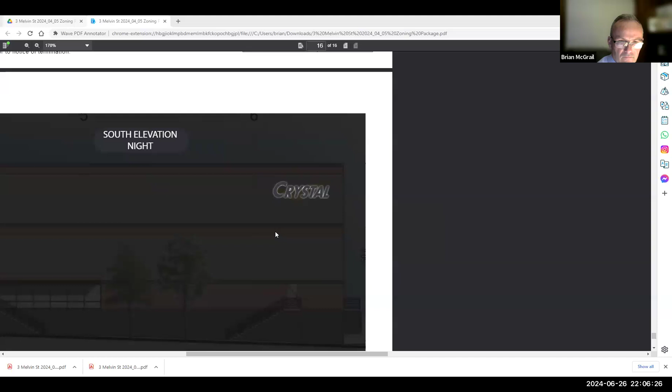Let me just see here. So this shows you, this shows you kind of how it would be halo lit. I want to get a nighttime shot of it. It's a good size sign, about 108 square feet, but I think proportionately it's what is needed on that building.

There's no, you know, my client's happy to entertain some time limits on this. There's no need to have this thing lit all night. So whatever the board would want to do on that, whatever you think would be appropriate. What time are the, Brian, I don't know, what time are the Shaw's parking lights on till? I don't know, Chip, but we can find out, I can look into that. I think my feel is there should be time limits. I don't think this thing needs to glow all night.

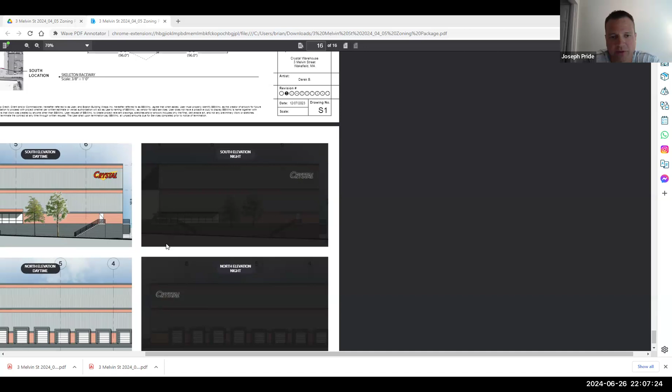No, and I think it should go off whenever Shaw's shuts down, because it's kind of that same thing. Yeah, I don't think that would be unreasonable. It's a warehouse in a way, so it doesn't even need to be all lit till 11 o'clock at night. I mean, I think anytime, a few hours after dusk, it should be fine. Right? Does it need to be up till 8, 9 o'clock at night in the middle of winter? I guess if the business hours are still open, but yeah, I'll find out.

My question is, what's their, are they bringing trucks in there till 9, 10, 11 o'clock at night? No, maybe, I haven't seen their O&M yet. Yeah, I'll get the hours, Chip. So this is why I wanted to talk to you about it. So I'll kind of get those hours, and maybe, for example, where the trucks are coming in, the trucks aren't going to come in from this side facing Water Street.

So, but they're coming in from the other side. So perhaps there will be a longer light on the other side facing McClellan, because that really doesn't impact anybody anyways. McClellan, you probably won't even see it from there, really. No, but that might be kind of, if they're coming in at nighttime, that might be an identifying feature for the drivers. So I'll find out some detail on that, and then we can fine tune it at the meeting.

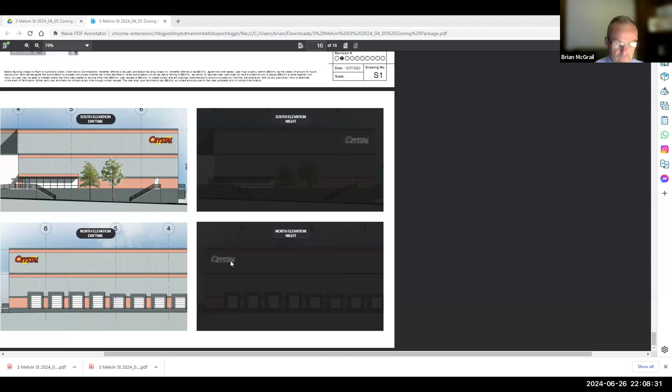If that's okay. Besides that, Brian, I'd agree with you—I think it's about the same size as what's up there now. Here's what they're proposing: it's red during the day and white at night. Oh, it's lit from behind, Joe. Yeah, that's kind of the look you get from it—it's halo lit.

So it's lit from behind, it just kind of highlights the letters. It doesn't light up the red, and you won't even see the yellow really—kind of see it a little bit. I think the yellow is just getting lit from the back of the light on the crystal sign.

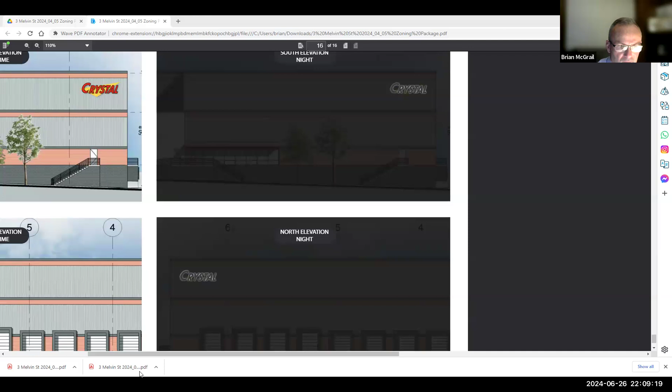Brian, did we get a copy of this? The application didn't have this. Yeah, it's a link, Dave. Did I miss it again? Because it's a link, I think you lose me when you put links. Okay, yeah, it's a link because it was too big for a PDF attachment. I can send it to you—you want me to send it again? I'm just looking again, I missed it.

When did you send it, roughly? It was probably, I'd say, Friday at 11:50—it might have been April, Dave. Might have been an April Friday email. Oh, back in April, okay. Might have been. Yeah, I see it now. Okay, got it, thank you.

That's all I have, Mr. Chair.

Okay, thank you. We do have some correspondence from the town. DPW has no comment at this time. Our senior planner has another letter for us.

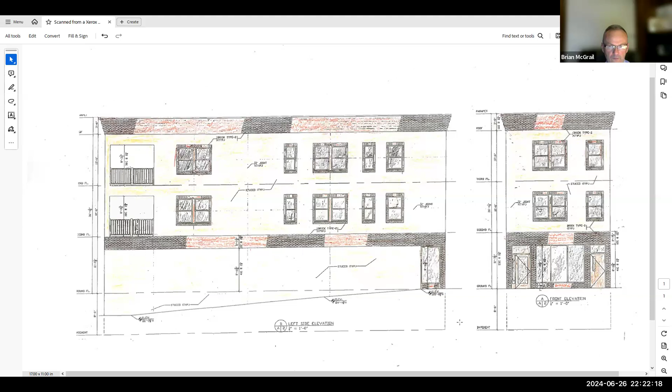The board has... I guess what I'm concerned about, Brian, is this doesn't stand alone downtown. It has buildings next to it. I'd love to see how this becomes part of the whole, or does it stand out and not coordinate with the buildings on either side?

So let's look at that, Chip. Maybe Dom can talk a little bit about that. Let me find probably the best way to go about that - if you go back to where the renderings, the photos probably are. Yeah, we're gonna need some kind of side by side, I think, to see what it looks like.

You've got to see how this sits between two buildings, between the co-op and the eyeglass place - two totally different buildings. How's it gonna fit in there? It's gonna basically... Dom, do you understand the question? Yes. So what's the height in context to the other two? How's it gonna fit, how's it gonna look in relation to the bank and the building?

This alley stays, so that alley doesn't go away where that car is. There will be a separation between these two buildings, but it's extremely close to the cooperative bank building. So Tom, can you address that? Yeah, how's this aesthetically gonna fit into the neighborhood with your design?

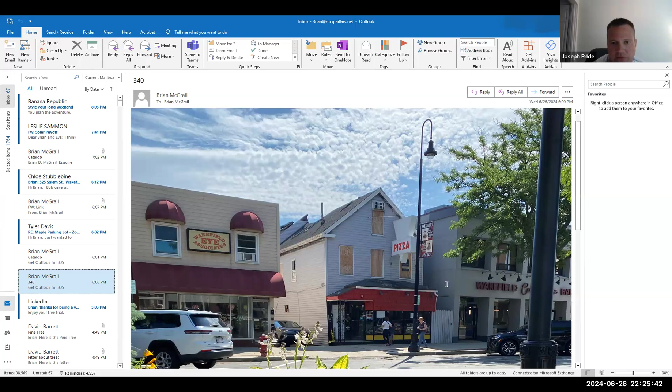Yeah, what's the roofline height compared to the other two buildings? Let's see, I think we might need more of a context study here, Brian, to really understand what the project is all about. Okay. Yeah, and you want to see where it relates the height to those other two buildings, Chip? Yeah.

Yeah, we can do that, right, Tom? Yes, we can get the height of both buildings and superimpose it on a drawing showing what would be on the left, which would be lower than the new building, but it would probably be very close to the same height as the existing bank that's there. But we can document that, Chip. Sounds good.

Okay, any other comments? I have a couple comments. Sure, please go ahead. I was looking at the plan that was submitted.

I'd like to see the stairs to the units above unit A a little bit wider, because it looks like you can only fit a 36-inch door right now. That's a little tight for somebody to bring in and out sofas and large furniture. Also, you can have a little bit more breathing space for the mailbox and stuff for the units above. And then I wanted to ask if there's a rooftop unit, like a mechanical unit, because I was wondering, the parapet is very high on the roof. Or is there a roof access for the tenant? Is that the reason?

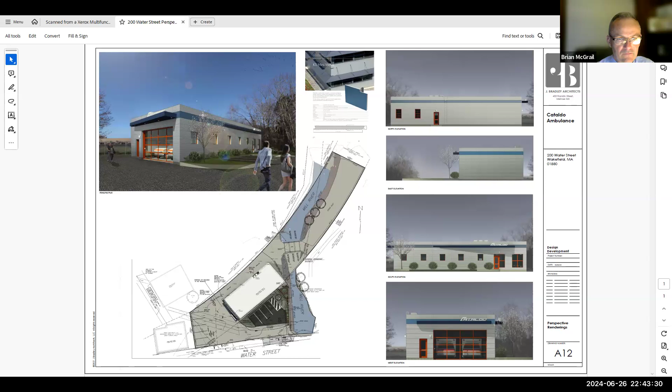And I'll show you how that's going to look. I've got two things to show you in that regard. That same exact sign, Brian? Yep, I'm going to show you, Chip. I wanted to show you the angle on it. I went out there and took a picture today, I thought this would be helpful for you. Building looks good, it's coming along well. So I went to the car wash across the street.

So this kind of shows you it will be right here. You can see the one that would have been on the garage door kind of makes no sense, and the one back here would certainly make no sense. So they want to put it here. It faces the car wash, so it doesn't face any residential, and they have a little rendering of kind of what it will look like.

Isn't there a tree right there, Brian, in the landscape plan? I don't think it's that high, Chip. If it grows that high. It's not that high now. No, but they're not concerned about it. I mean... okay.

They have to cut it down. Yeah, get rid of it. But the sign? Okay, say it fell down. I don't think they get a lot of foot traffic anyway, so... Oh, I get it, that's a dad joke. Yeah, that is a bad joke. I just got it.

So this is the actual building kind of showing where that will be located. It's only a couple of feet high. It's a white sign, internally lit, 11 feet long. It's actually important for them to have their identity though, because they are public safety and people need to know where they are. So that's it, they want to lose one sign and move one.